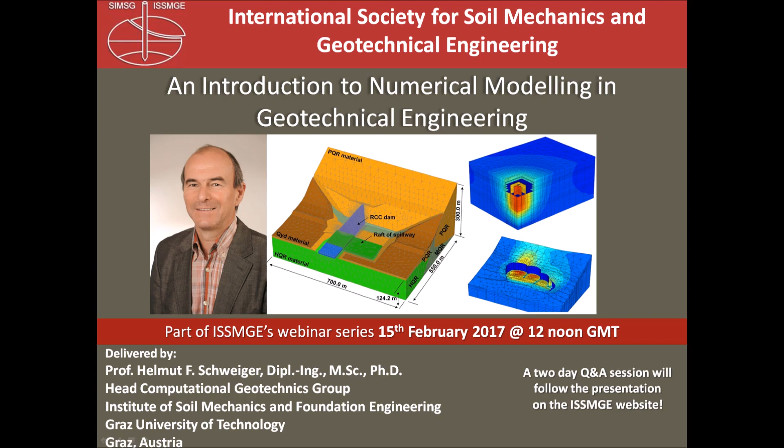Welcome to this webinar of the ISSMGE on numerical modeling in geotechnical engineering. This is supposed to be an introduction, and therefore I will address our younger colleagues and not so much the numerical expert. I will also concentrate on practice, so I will not talk about research.

The outline of the presentation is a short introduction into numerical modeling, then some specific aspects we have to deal with in geomechanics, a short note on constitutive models, and then I will present an example for an SLS calculation and for an ULS calculation. And then I will come up with some final remarks.

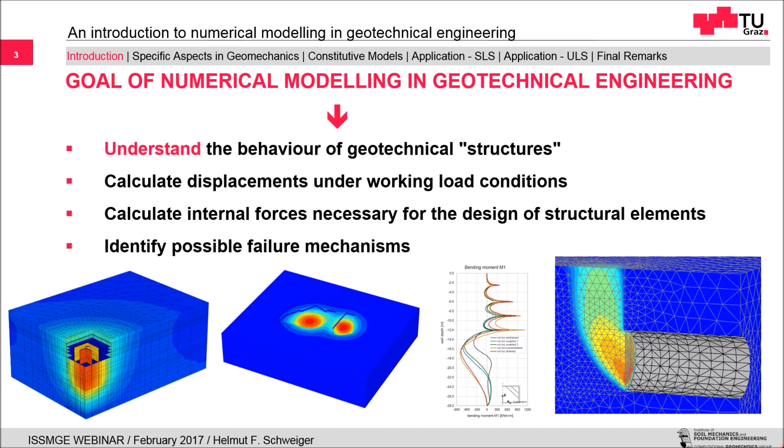Now, what is the main goal of numerical modeling in geotechnical engineering? First of all, I would say it's understanding—understanding the behavior of geotechnical structures. But of course, we also want to calculate displacements under working load conditions. We want to work out internal forces which are necessary for the design of structural elements, and we want to identify possible failure mechanisms.

We can do this when we have appropriate geotechnical models and a very good understanding of soil mechanics. This is sometimes overlooked when people do numerical analysis—that the basis of all of what we are doing is soil mechanics. We need to understand what the software, and in particular the constitutive model we are applying, does, and have a clear picture of what we can do and what we cannot do. So please be aware that we do models, we don't do reality.

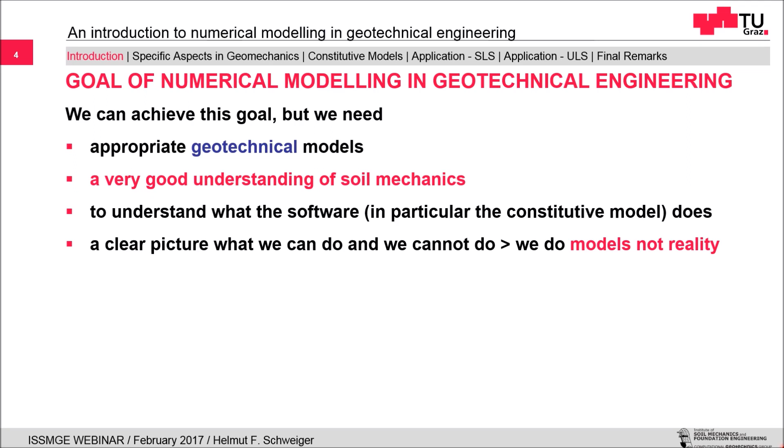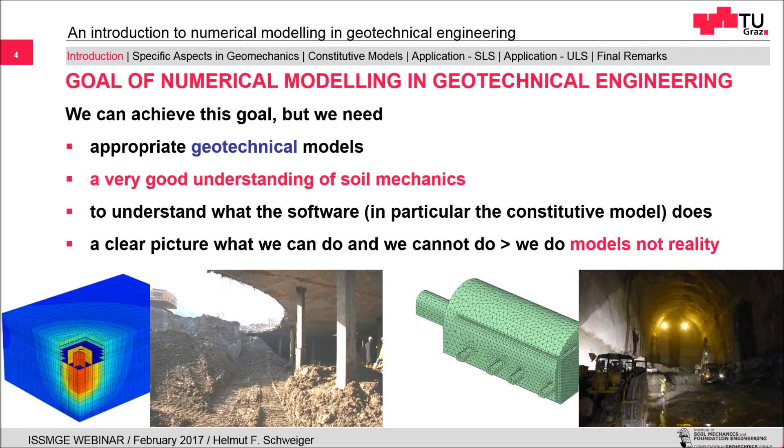As an example, I have a picture here of a deep excavation, how it looks on the computer and how it looks on site, and the same for a big cavern. This is just to emphasize that we can never picture the situation one-to-one into a computer.

The scope of this lecture is to make you aware of specific problems we have in numerical modeling in geomechanics, which are different to, let's say, structural engineering or mechanical engineering. I will give some guidelines on the requirements for constitutive models for certain classes of problems like foundations and excavations, address determination of input parameters—not going into much detail, but just highlighting a few of the difficulties we have—and point out some of the decisions you have to make when creating a numerical model for a particular problem. Along the way, I will try to highlight some pros and cons of numerical modeling.

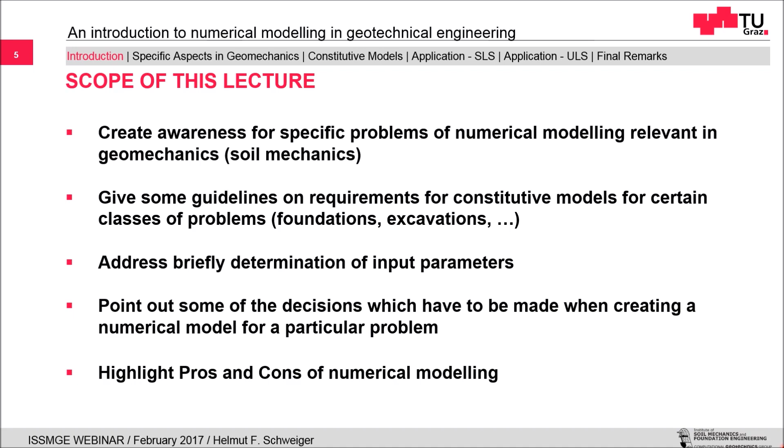I'm not covering numerical methods in detail in this lecture, so the theoretical aspects of it. I'm not going into plasticity theory, although the majority of constitutive models we use in practice are actually based on plasticity theory. This is not necessarily the case for some more advanced models, but in commercial codes, I would say most of the models are based on plasticity theory.

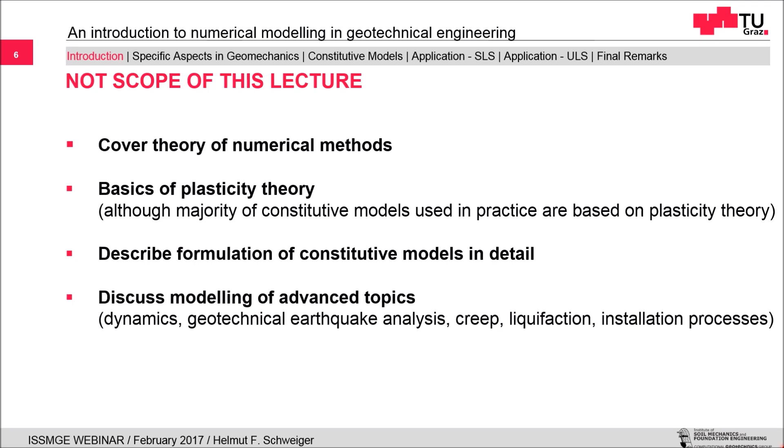I will also not describe constitutive models in much detail, and I will not go into advanced topics like geotechnical earthquake analysis, liquefaction, installation processes, dynamics, and so on. And I will also not cover the topic of how to arrive at a geotechnical model. That means how to establish the soil profile, the description of soil layers, etc.

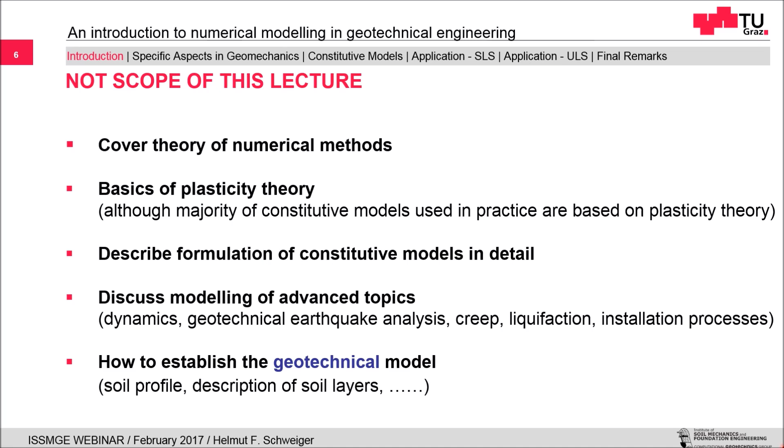Now to start with, I want to make a comparison between what I call here a conventional approach in geotechnical engineering and computational geotechnics. Conventionally, we analyze the serviceability limit state by some simple means, like taking models based on elastic half space or some diagrams or design charts, and the input parameter is some form of stiffness, let's say the one-dimensional compression modulus for a settlement analysis.

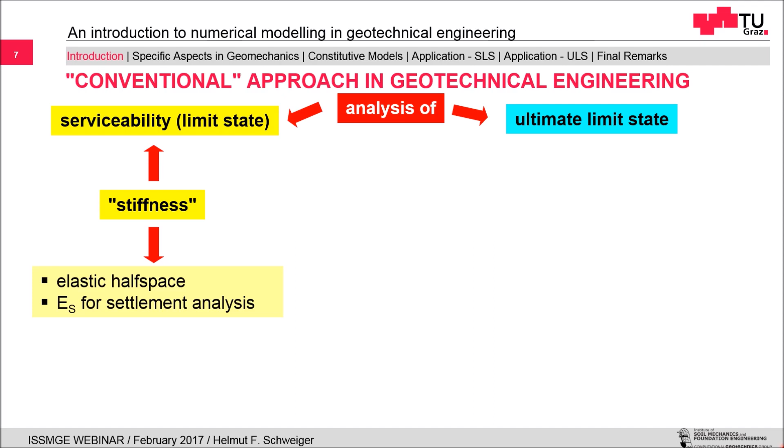And then we do an analysis of the ultimate limit state, which is a completely different model, and that is what we usually do by means of, for example, methods of slices if we do slope stability analysis, or other limit equilibrium methods. Here, of course, the governing parameters are the strength parameters, that is effective friction, cohesion, or the undrained shear strength. Now, these two models and also the input parameters do not interact at all. These are two completely separate analyses.

And that means that we have to significantly simplify the material behavior and to some extent also the geometry. Now the advantage of this is that we have several decades of experience, but the disadvantage is certainly that for complex soil structure interaction problems, a realistic assessment of displacements for working loads is not really possible.

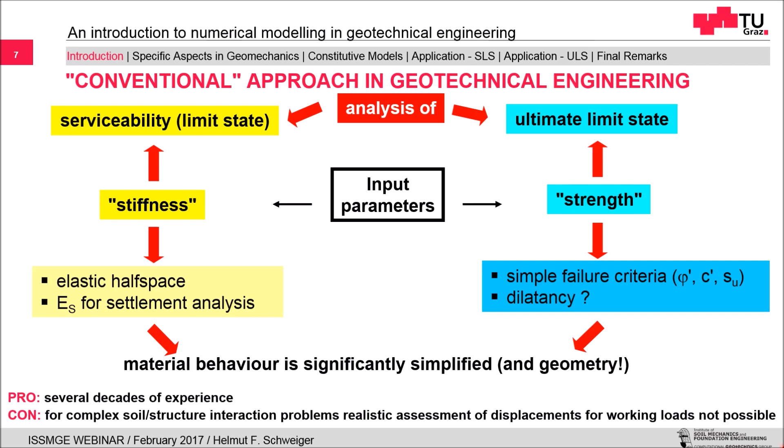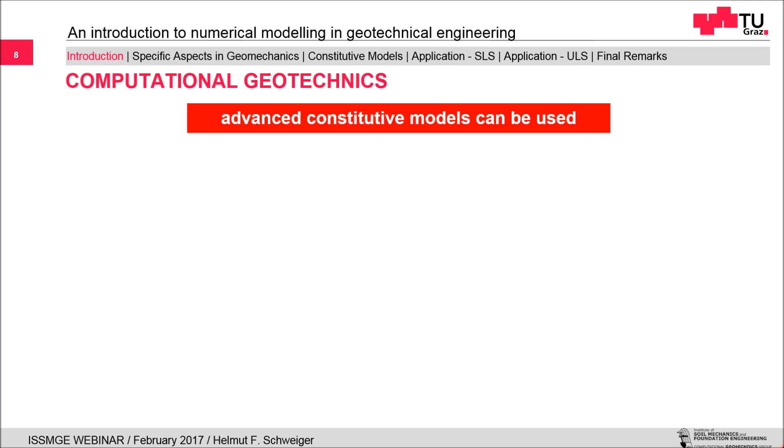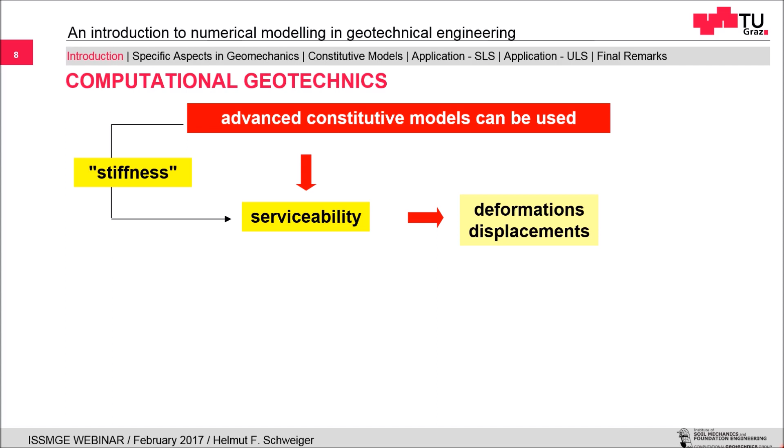Now on the other hand, if we do computational geotechnics, we can use very advanced constitutive models. That means we also will work out deformations and displacements under working load conditions. But now, instead of moving to another model, we can use the same model to work out ultimate limit state conditions. That means we will obtain a failure load or a failure mechanism. You can do this in different ways, and if you have a foundation, you probably simply increase the load until you reach failure. Or in other cases, you may reduce the strength of the soil until you reach numerical failure. And from that, you can then work out your factor of safety.

Now the key issue here is that you can use the same model as for the serviceability limit state. And also the parameters are not that clearly separated anymore, because your strength will influence serviceability to some extent, and depending on the model, stiffness will probably have some influence on the ultimate limit state.

Strictly speaking, we could also do post-failure behavior, where I mean that you have materials which show softening behavior, but I have to mention that you have to enhance your finite element formulation for doing so in order to get mesh-independent results, and this is beyond the scope of this lecture today.

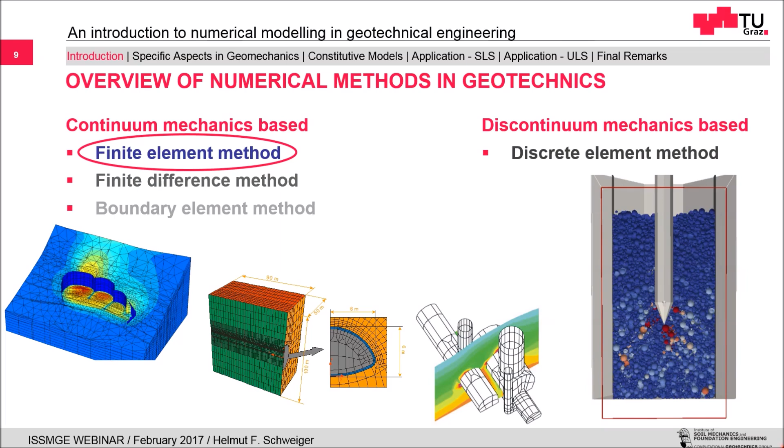However, if you embark on a numerical analysis in geotechnics, you have basically two classes of methods. The first one is based on continuum mechanics, so that's the finite element method, for example, the finite difference method, or the boundary element method. And then you have methods which are based on discontinuum mechanics, and this is, for example, the discrete element method. Now I will concentrate today on the finite element method, but most of what I say will equally be valid for the finite difference method.

Now, what are the main problems we solve in geotechnical engineering? First of all, we want to have, as mentioned before, displacements and stresses under working load conditions. So we apply a load, and that can be very general, also an excavation or whatever. And we may solve a flow problem. So we apply a head and obtain a flow pattern. And in some cases, of course, we have to couple the two. Now, what we would like to have is a solution in any point of our project, but that is, of course, not feasible.

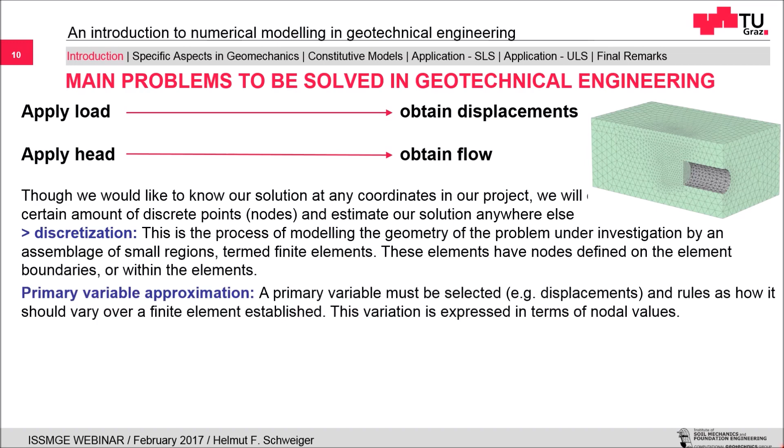So we do what we call a discretization. So we divide the domain we want to analyze into so-called finite elements, and we actually obtain our solution only in certain points, at the nodes of these elements. And then we make some assumptions how our primary variable, which in a mechanical analysis in the simplest form is the displacements, varies over the element, and usually we do this by means of a polynomial.

This implies that we can have different forms of polynomial, which means we have different finite element types. And in short, the higher the number of nodes, or the higher the order of the polynomial, the more accurate the results will be. Now, what is important to see here is that the solutions we obtain are not the exact solutions, but are approximate solutions to the boundary value problem we are solving.

And of course, the better the model, and I put "model" in quotation marks, is not only the element, it is really all our modeling assumptions we have to make, and I will come back to that when I show the example. The better the model, the more accurate is the solution. However, for a real boundary value problem, we will never know how far away we are from the exact solution, because for a complex real geotechnical project, we do not know the exact solution. But that doesn't matter. I think we just have to make sure that we make a good, appropriate model, and then we will be close enough for any practical purposes.

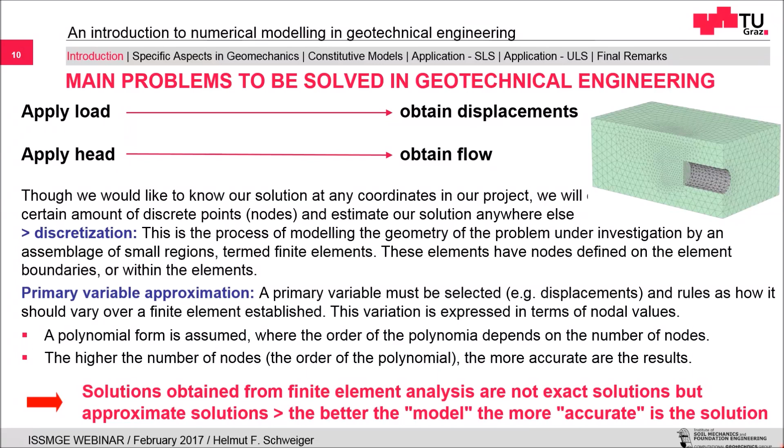Now, coming to some specific aspects we have to consider in geomechanics, which we do not have, let's say, in structural engineering or in mechanical engineering. First of all, strictly speaking, we have to choose the domain we are going to analyze. A priori we cannot say how far the influence into the surrounding ground of an excavation or of a tunnel will be. Of course, we have some experience and there are some guidelines on how large your domain has to be, but it is different from an analysis of a bridge where you exactly know your structure.

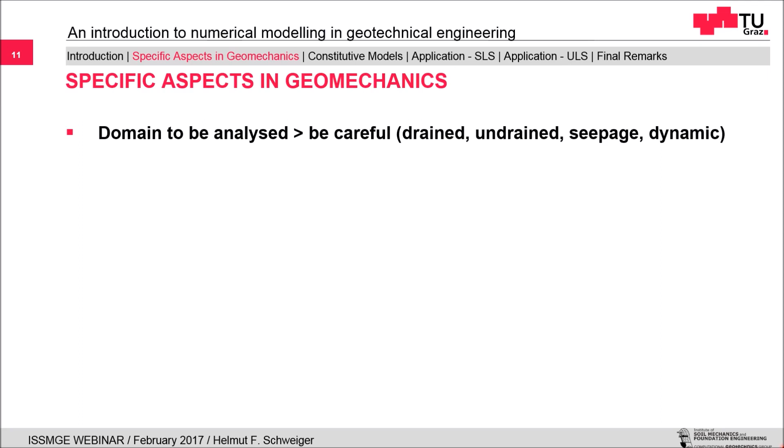Now, for the same problem, you also have to be careful, because whether you do a drained analysis, an undrained analysis, a seepage analysis, or a dynamic analysis, you will have to analyze different sizes of the domain. So that is one thing you have to be aware of in the first place when you start doing your model. Then we have to start with some form of initial stress state.

Now, if we are near surface, that is usually well known, so we will have the vertical stress based on the soil weight, and we will have some form of horizontal stress based on the K0 value. Now, if the soil is highly overconsolidated, then we have some uncertainty already in the K0 value, and we very often do not know exactly how large the overconsolidation was, and that will have some influence on the results, because all our analyses in geomechanics are nonlinear analyses, and so the starting point has an influence on the result.

We also have uncertainties in the ground profile and in groundwater conditions. We do have to model soil structure interaction. And here again, all codes will have some different approaches by using interface elements or contact elements. So you have to be aware again of the way your particular code is handling this soil structure interaction. We have to make some simplifications in modeling the construction sequence, and it's also very difficult to model installation techniques like jet grouting or mixed-in-place columns, for example.

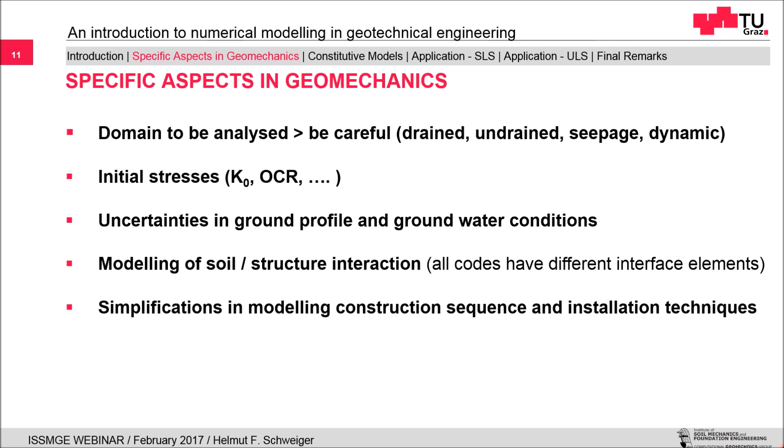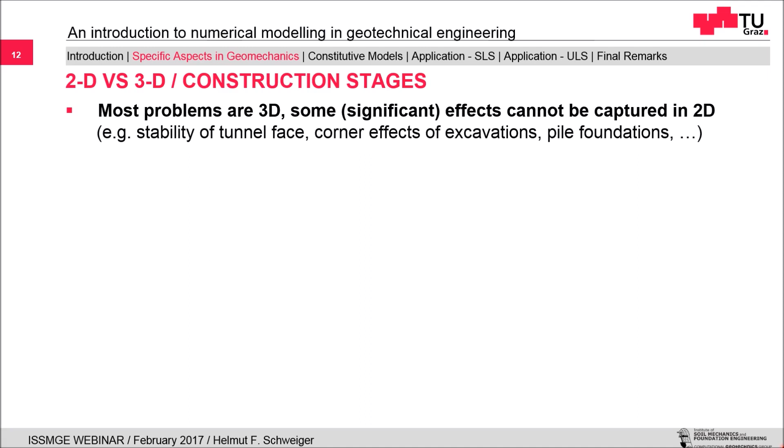And then most of our problems are actually 3D. And some significant effects we simply cannot capture in 2D. So one of these is the stability of a tunnel face, the corner effect of an excavation, or pile foundations or piled raft foundations. These are real problems you have to do in 3D. Now in practice, we still like to do 2D in many cases, mainly for time constraints. And we have invented some ideas how to include 3D effects in 2D analysis, like pre-relaxation factors in tunneling.

But again, this will be a decision you have to make when you start your modeling exercise, whether your particular problem is well enough represented in 2D, or you will miss too many details so that it is not worth doing it and you have to go to a full 3D analysis.

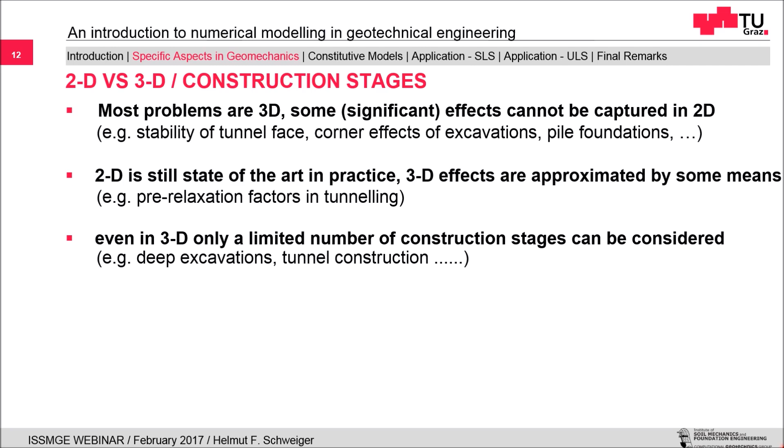Now, even if you do a 3D analysis, you will not be able to follow all construction stages in detail. So I have shown 3 examples in here where you will probably go for 3D, but again, you will not be able to model all the steps in your model. And you have to make a decision, what are the important phases which I have to have in the model and which ones are not so important, so then I can simplify them.

And then we also have to think about the constitutive model. Now, there is no such thing like the soil model. There are different models around, and if you have a certain code, you will have a library of soil models, but they will be different from code A to code B. Now, in practice, still some people use a simple failure criteria like Mohr-Coulomb for analysis of serviceability limit states of displacement and stresses, but this is not a very good choice, as I will be showing in a minute.

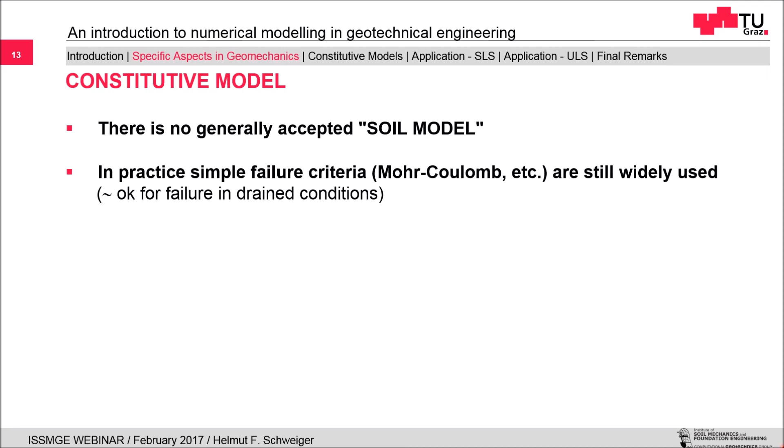It is, I would say, okay for failure in drained conditions. The next class of models, or the next model which is pretty popular and around for a long time, is the modified Cam-clay model. It has the significant advantage over a failure criteria that it is a strain hardening model, and this can be successfully applied in some problems like embankments on soft soil, although also we have made in the last decade or so some improvements on this type of models. Now, fortunately, also in practice, the benefits of using more advanced models are being recognized, in particular for excavation problems. And I will come back to that a little bit later on.

Now, why we still do not see that many of the advanced models used in practice is partly because in usual geotechnical reports we do not find all the parameters. Again, I will come back to this a little bit later. So parameter identification will still be a problem. And then sometimes for the client it is difficult to judge what he gains in terms of safety and costs.

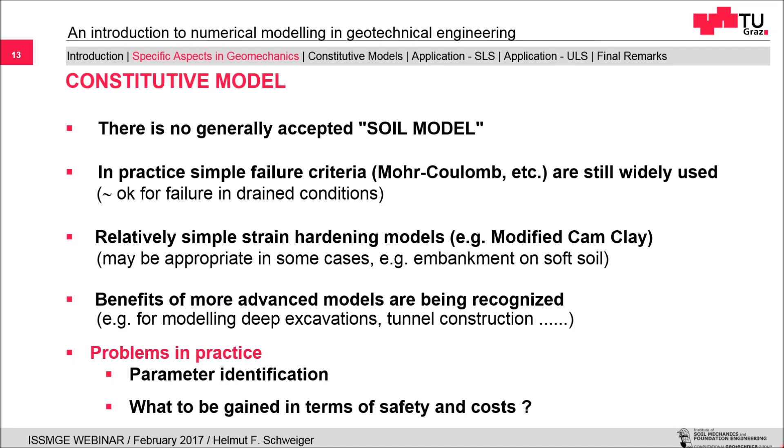I sometimes get a phone call, and a client asks me, if I give you a contract for finite element analysis, will I save on the reinforcement in a retaining wall? Well, that's not so easy to say, because it depends on a lot of factors, whether finite elements, for example, will give you less bending moment in your wall than a conventional analysis. But of course, as I hope to show you throughout this lecture, I'm of the opinion that you gain because you gain in understanding of your structure, and the better understanding of your structure will inevitably give you a higher level of safety.

Now, summarizing these issues we have just recalled, but putting them in a very positive context, I would argue that the advantages of numerical finite elements compared to conventional analysis are that you can simulate the complete construction history. So I have made some restrictions and said, well, you will never be able to follow all the details, but you can follow the history of excavation or building an embankment or a dam or whatever. If you know and if you want, you could, strictly speaking, also simulate the geological history, at least to some extent.

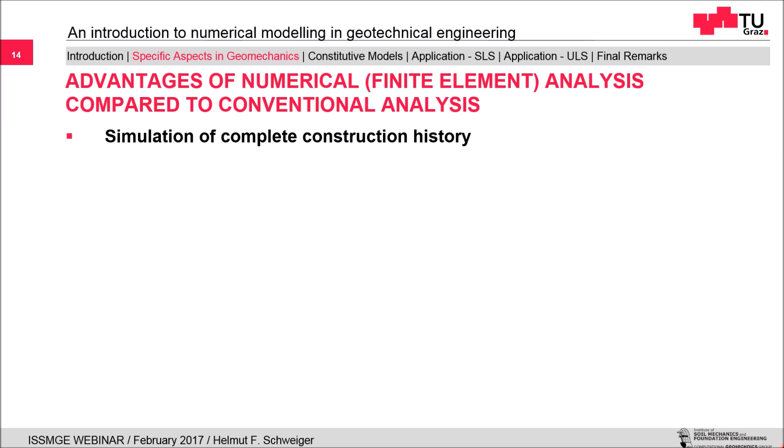You can then model the interaction with the water rigorously, so you can do a drained analysis, you can do an undrained analysis, you can do a coupled consolidation analysis. You will take care of changes in groundwater table during excavation if you lower the groundwater table, etc. This can all go into your numerical model. You can model complex geometry. At the end, there is no real limit on that. It's just how much effort and how much time you want to put into your model.

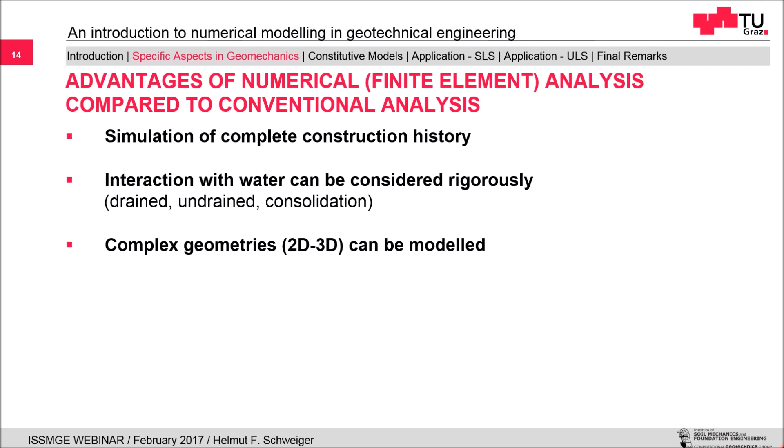But in theory, you can do very, very complex models, and you can use, if you want, and you have the respective code, a couple of million degrees of freedom if you want. But it's not always the case that you need that. So if you have a lot of experience, you will be able to make a model with a reasonable size.

Now, if you use an advanced soil model, you can capture important features of soil behavior. As I was mentioning before, there is no single universally accepted soil model. There are different models around, and different models can represent different features of soil behavior to a different extent. It depends really on your soil conditions, the ground conditions, and the purpose of the analysis, which of these models will be the most appropriate one for you.

We can model soil structure interaction by means of interface elements or contact elements or contact algorithms. But again, there will be some differences in codes. And if we look at failure, I think we have one significant advantage as compared to conventional analysis like limit equilibrium analysis, such as method of slices, where we have to assume a form of failure mechanism and the program then just picks up the one with the lowest factor of safety. But here, when we do finite elements or finite differences, we do not need to specify the failure mechanism. It is an outcome of the analysis. And this is, at least for complex structures, a significant advantage.

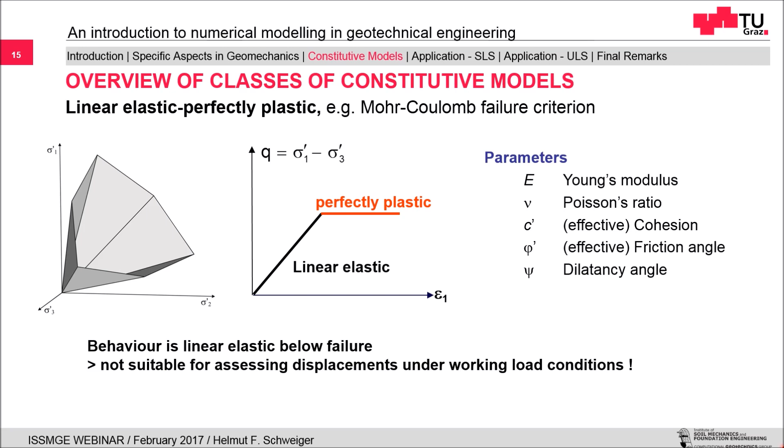A special case of this criterion is, of course, the Tresca failure criterion, where you put the friction angle to 0 and you put in as cohesion the undrained shear strength. And then you can use this criterion also for undrained conditions, but only in terms of total stresses. This is a very special case, which we usually do not recommend to use in finite element analysis, but you can do it because it's a clear simplification and you know what you're actually doing.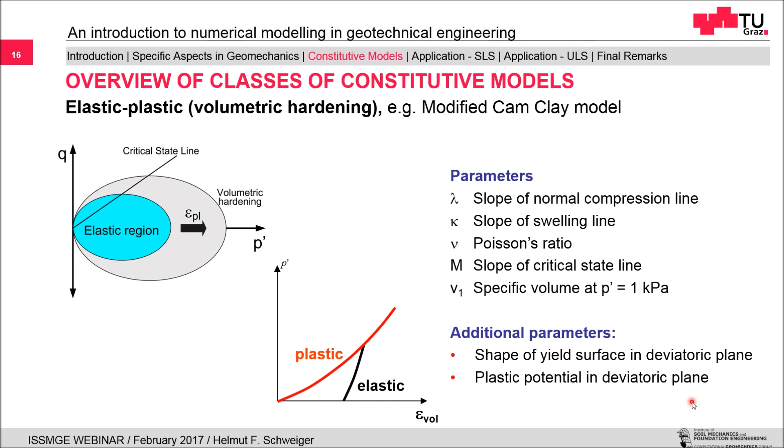Again, parameters can be obtained from oedometer tests and triaxial tests, but at the end you will need some form of engineering judgment, usually because they will not be given in the form you require them in standard geotechnical reports.

Now with the advanced models, what you can do is add additional features like small strain stiffness. That's again very common, and today I think all the codes will provide you with a model which can model small strain stiffness, meaning considering the high stiffness of soils at very small strains and their decay, showing here for an example the shear modulus against the shear strain.

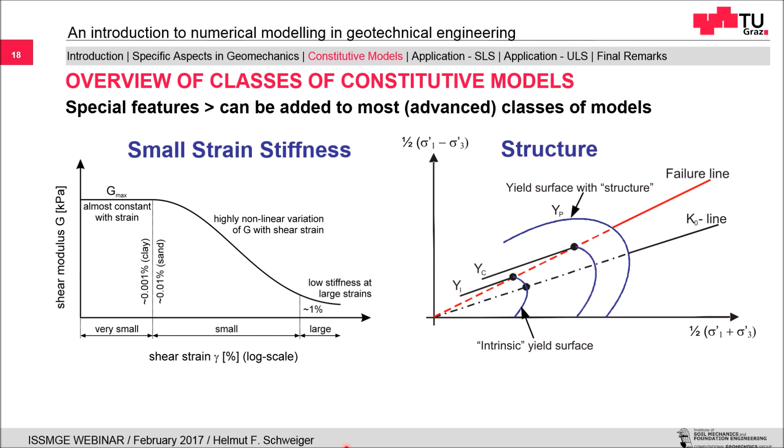Also, models can include structure if you have a clay, for example, and this is usually also based on modified Cam-Clay type models, but you could add this to most of the advanced models.

I will stop here in describing the classes because, as I mentioned before, I'm talking here about practice, and so I'm not going into models which are available only in research. But just to mention them, of course, we have models which have not isotropic hardening but kinematic hardening, models dealing with anisotropy, and models, for example, based on hypoplasticity.

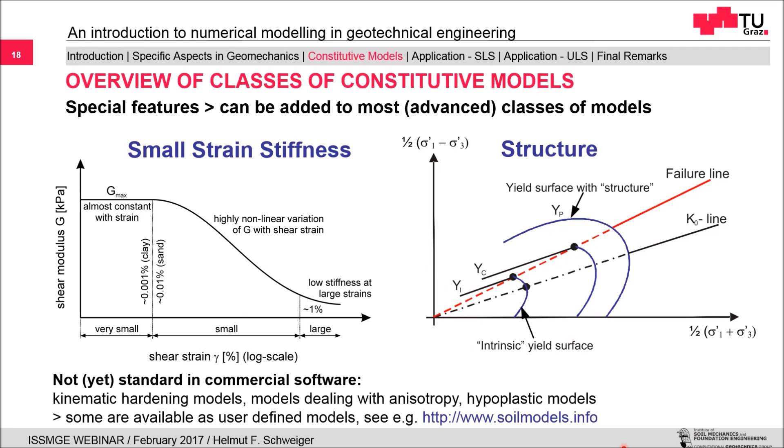Some of these models are actually available on the internet, and there is a platform which is given here, soilmodels.info, and here you will find some very advanced models in the form of user-defined soil models, and you can then add them to, let's say, Abaqus or Plaxis.

Now on this slide I will do something which is really dangerous. I'm aware of that, and I expect some criticism on that, but I give it a try. So what I want to do with this slide is to give you an indication of what type of model you need for what type of problem.

So I have indicated here failure, drained, and this FOS, I mean factor of safety, or undrained in total stresses. Okay, and the important thing is undrained in total stresses. If you do an undrained analysis of failure in terms of effective stresses for a soft soil, for example, then matters become a little bit difficult and are beyond the scope of this lecture.

Then I have here monotonic loading on a stiff soil. So with monotonic loading, I mean a structure, a building you put on piles or on a raft or whatever. The same thing on a soft soil, and an embankment, of course, also falls into this class of problems. And then I deal with excavation problems. And here on this axis, I have the models with increasing complexity.

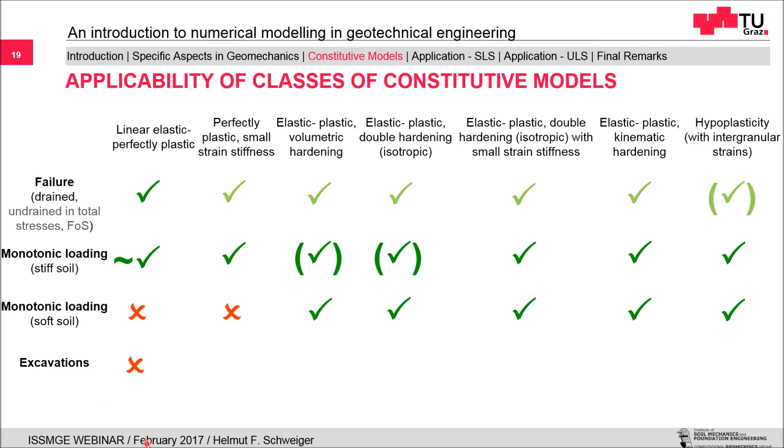Now excavations is probably the most difficult problem within these standard problems in geotechnics, I would say. So I said I won't cover dynamics and these sort of things. Again, for a stiff soil, highly over-consolidated, you may again get away with the failure criterion when you put in a reasonable small strain stiffness model inside.

Again, this elastoplastic volumetric hardening, the single hardening one with no small strain stiffness, will not give you very good results. The double hardening one is better, but still, of course, I would prefer these higher order models for excavations, whether they are in soft or in stiff soil. So the only difference is that for highly over-consolidated soil, you probably get away with this model.

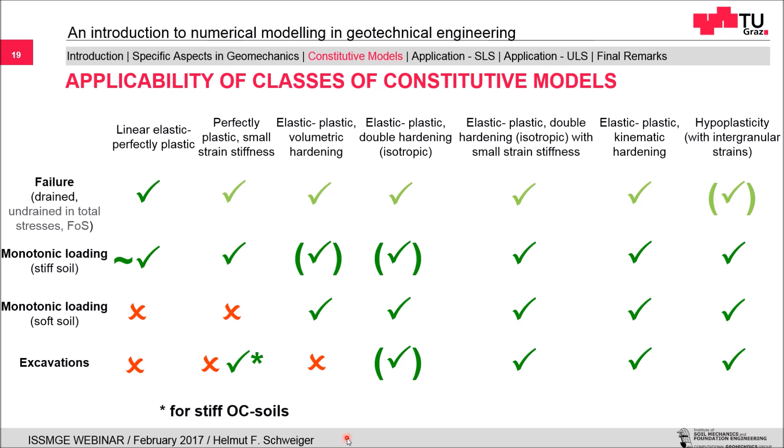So as I said, I'm fully aware that this is a bit of a dangerous thing I'm doing here, but I hope that for those of you who have not so much experience and start doing numerical modeling, it will give you some indication of what models you should look for if you have a certain type of problem at hand.

Now we move on to the two applications. And what I do with the first one is a deep excavation, and we look at serviceability state. When I describe this example here, I will point out a couple of decisions you have to make in order to arrive at an appropriate model. And then I will show you on the results what the influence of these decisions is.

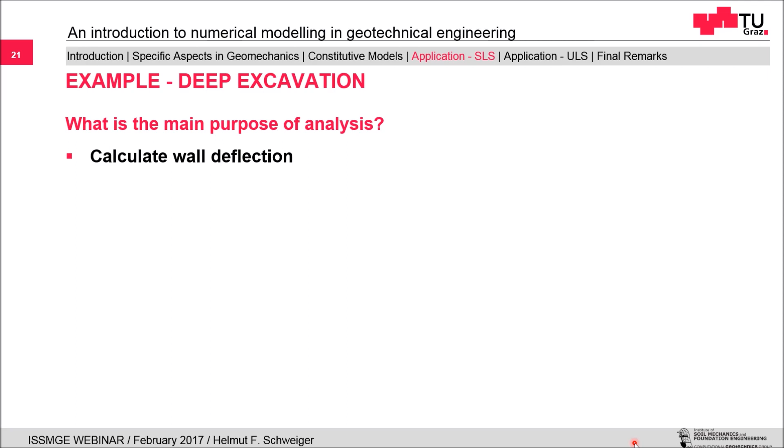Now, what we also have to be very clear about before you go to the computer and start modeling is what the main purpose of the analysis is. Why am I doing finite element for this problem? In this case, it's fairly clear. We want to calculate wall deflection, because the wall deflection will have an influence on the settlements behind the wall, and these settlements may cause possible damage to adjacent buildings. We want to have bending moments in the diaphragm wall in order to make a design, and of course also the strut forces. All these under working load conditions.

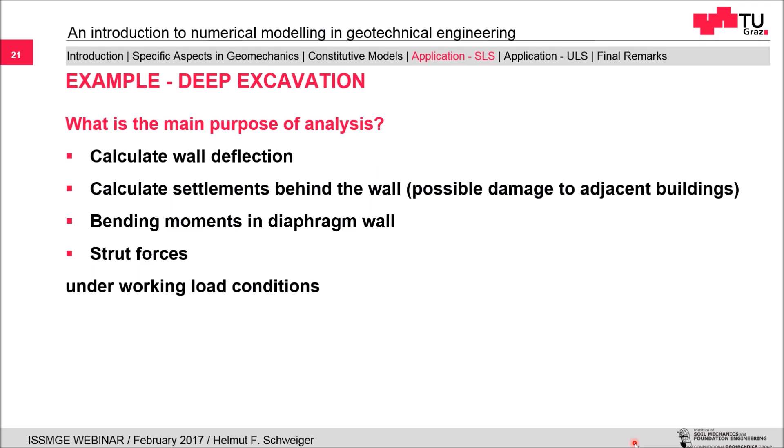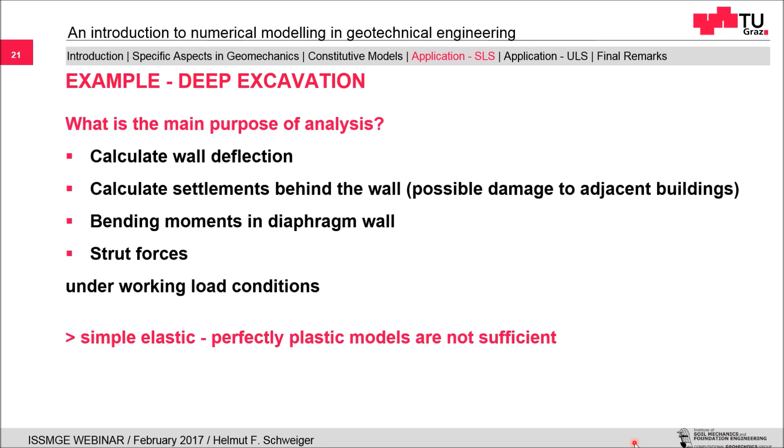Now, having mentioned working load conditions, you may use this analysis as well to do a design based on Eurocode 7, introducing partial factors of safety, but I'm not going into detail of how you do that. That would really be probably a separate lecture. But what this means is that a simple elastic, perfectly plastic model is not sufficient. And if you remember the slide I had just a few minutes before, when I was talking about different problems and classes of models, you will realize that I'm much more on the advanced model side for this type of problem.

Why is that? Well, the stress paths in this type of problem are not monotonic, so you will have significant changes in stress path directions. It depends, of course, a little bit on the construction sequence, on whether you pre-stress struts or you have anchors which you pre-stress, and so on. But in general, they are not monotonic. Different parts in your soil will follow stress paths which are by no means monotonic. You will have parts which are in primary loading, and you will have parts in your soil mass which are unloading or reloading. And this, of course, invokes different stiffnesses, and the model has to do this. You will have areas where you have plastic strains, relatively large strains probably, but then you will have parts in your domain where you have very, very small strains.

That means your decision number 2 you have to take here is the constitutive model. And as I mentioned before, we will go here for a double hardening model with small strain stiffness. That is in line with what I have said before.

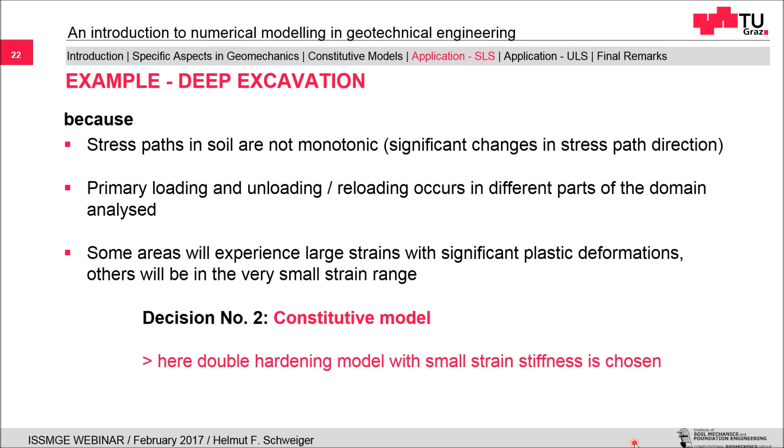Now, when we do 3D, our next question has to be: can we apply symmetry? It may not be obvious at first, but if you go for a 3D analysis, you will realize that you end up with very large models very easily. Of course, computers today can do that, but you still want to simplify as much as possible. And this again depends not only on the geometry of the excavation, but also on the buildings which are surrounding it.

In this particular case, we chose symmetry. I have to say that this example is based on a real project, but we made a parametric study investigating a couple of things, and there we simplified it to allow for symmetry. This decision has to be made, but whenever possible, please make use of symmetry, because you can reduce your computational effort.

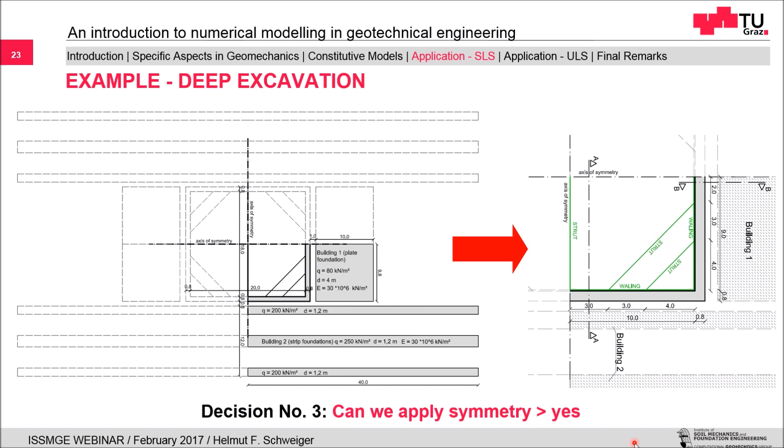Now, once you have done that, you have to make another decision: what are the relevant construction stages, including changes in the groundwater. It depends a bit on how you construct the excavation, but in this case we have a diaphragm wall, and in most cases in practice you will not model the installation of the diaphragm wall. You could, and there are some papers in the literature which tell you how to do that, but in most cases in practice you would do what we call wished in place. So that means you will simply place the diaphragm wall into your model.

But that means, and that is what you have to be aware of, you will not have deformations or displacements obtained from your model which are caused by the installation of the diaphragm wall. Whether these are significant or not depends very much on the soil conditions, but also on workmanship on site and other issues. So I'm not going into detail of that. But what you will certainly do is specify certain excavation levels you want to have in your model, and that is what you have to provide for.

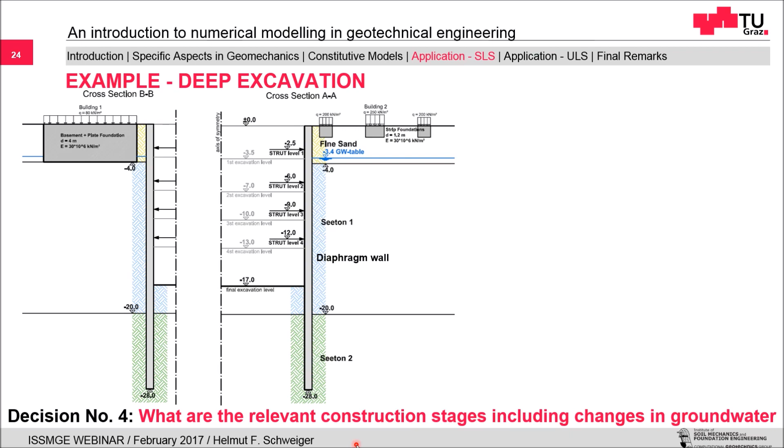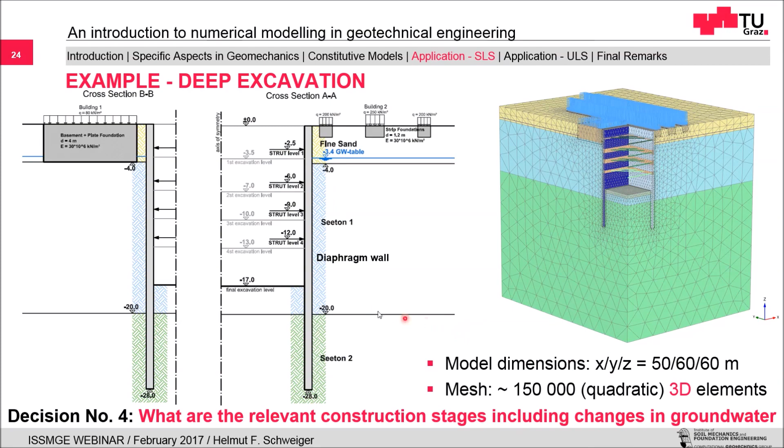Of course, you have to make phases where you install your struts, probably pre-stress them, and not to forget, you also have to consider changes in the groundwater. In many cases, you will not change the groundwater table outside, or you will not be allowed to do so, but you will of course change the groundwater table inside the excavation. There again, it depends very much on the soil conditions whether you do a flow analysis or make some assumptions on the groundwater. But you have to think about it and make the appropriate choice in your model. In this case, we ended up with a model like this. You see the excavation stages, the struts, and the load on top of it, and this gave about 150,000 quadratic 3D elements.

Now, the type of analysis is the next step: drainage conditions. Again, this depends on your ground conditions, and in particular on the ratio of the permeability of the soil layers with respect to the time you need for construction. The limiting cases are a fully undrained analysis and a fully drained analysis. What is usually more realistic is a coupled analysis, so you do consolidation during excavation. One extreme case is that you do an undrained analysis and then a consolidation at the end. It really depends on the soil conditions and on the time of construction, but you have to think carefully about what form of analysis you will perform.

And then you have another option in how you model the wall. We assume here, in this particular project, that we have a diaphragm wall. Diaphragm walls are, I would say, at least 80 centimeters thick, or maybe 100, 120 centimeters. And that means if you model the wall by a plate element, or in 2D maybe a beam element, what happens is that you basically ignore the physical dimensions of the wall.

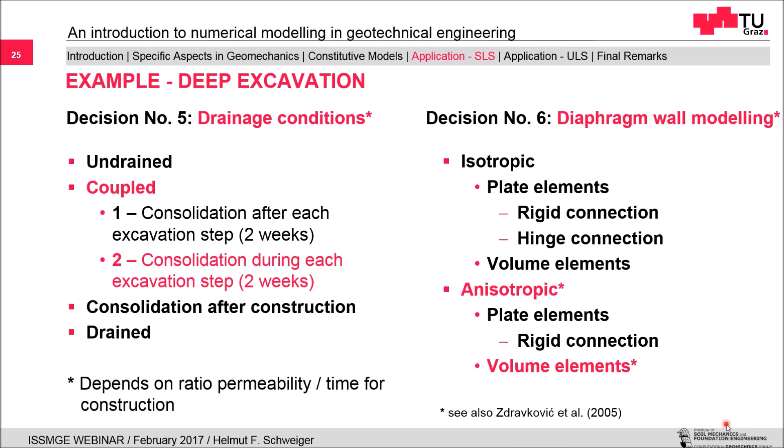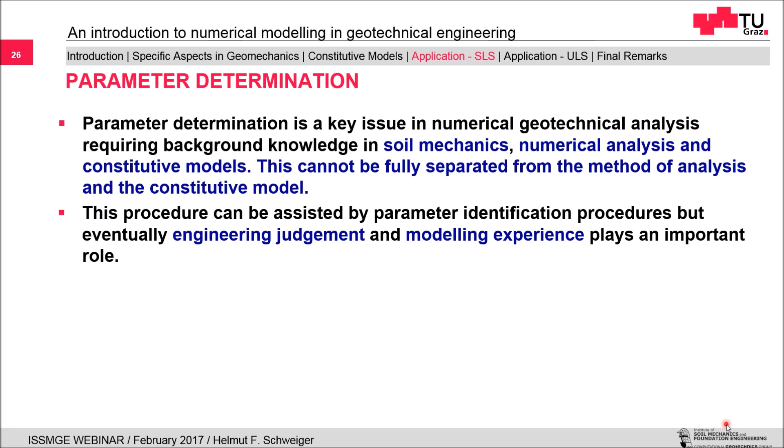Now, parameter identification. This is a key issue in numerical modeling, and unfortunately this cannot be separated from the method of analysis and the constitutive model we are using. It needs really a good background in soil mechanics and in the model you're going to employ. This is a bit unfortunate, but it is like it is. Now, some codes provide you some form of parameter identification procedures which really help in getting your parameters, but at the end you always need quite a bit of experience and engineering judgment to arrive at a good set of parameters for your particular model.

And in most cases you will not get these parameters directly. You will need some interpretation from the available information of geotechnical reports. And usually these reports will never be complete, so you will, in most cases, have to estimate additional parameters you need for your constitutive model, and of course this again requires some experience.

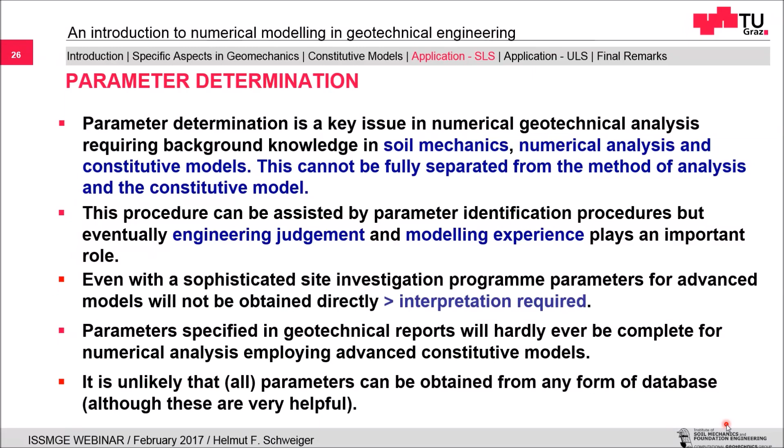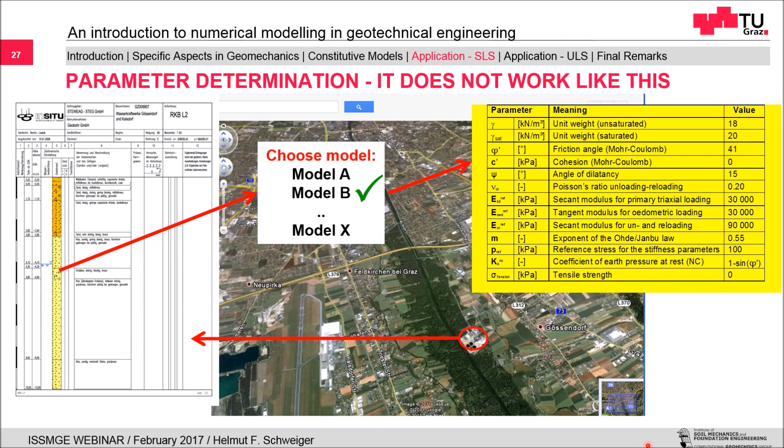Now, actually this is feasible, but then the dream of the numerical analyst is that you choose then for a soil model A, B or something, and then you get the parameters. But please look what I have written here. It does not work like this. So I don't believe in that, although I know that some software vendors try to do similar things, provide databases for their models for different types of soil, but I think this is really dangerous, and I strongly believe this should be the issue of the geotechnical engineer who runs the analysis to establish the input parameters.

Now, why is this so difficult? Well, first of all, similar parameters have different meanings and therefore consequences in different soil models. This is not very nice, but unfortunately it is like this. And that is again why you have to be pretty clear what your model does and what the parameters do in your model.

And one of the problems or the reasons for that is that many of our material parameters are not really material parameters. Now, what I mean with that is, as an example, if you have a quartz sand, and if this sand is in a loose or in a dense condition, then the material is exactly the same. It's the quartz sand, but even with advanced standard models, you will input different parameters for stiffness and strength. So these parameters are actually a mixture of material parameters and parameters which depend on the state the material is in.

Now, having said that, there are models around which overcome this problem, but as I said before, most of them are not readily available in commercial codes, and therefore they are not used that often in practice. But I think the modelers work on this.

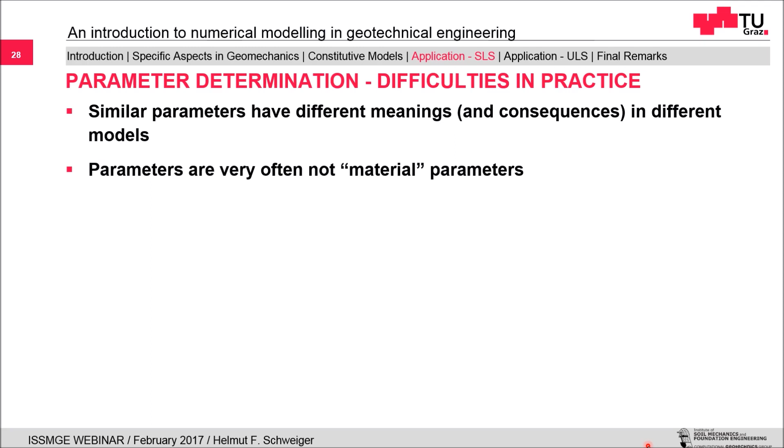Now also we have limited testing procedures in practice. I'm not talking about sophisticated testing for research, so the stress paths are limited, which also may have some influence on the parameters. We do have more and more correlations with in situ testing, so that's certainly a field which will improve and will make some progress in the near future, that we get better correlations from CPT, DMT or pressuremeter tests where we can get our parameters. I'm personally very much in favor of this in situ testing, but we are far away from doing a CPT test and saying, well, that's our parameters.

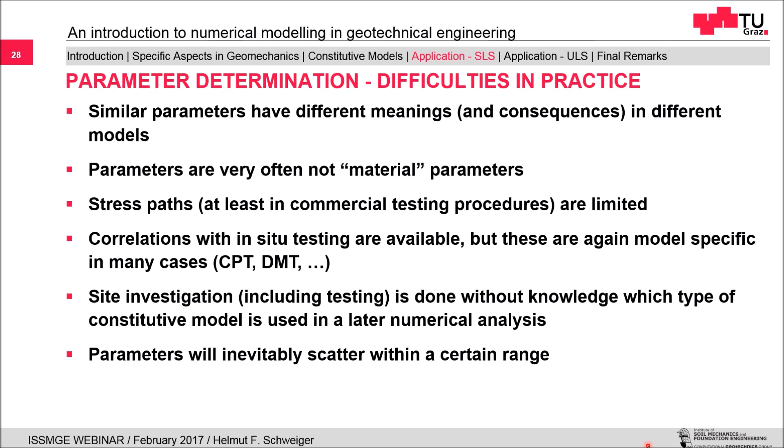To come to an end on these parameter determination difficulties, in most cases the site investigation is done without knowledge of what is done with the information. So sometimes we don't even know whether a numerical analysis will be performed or not, and also of course not which constitutive model is to be used. So that means we cannot really design a site investigation program specific to the needs of the model, because at the time you do that, you don't know the model. And also the parameters will inevitably scatter within a certain range. That is what we have to live with.

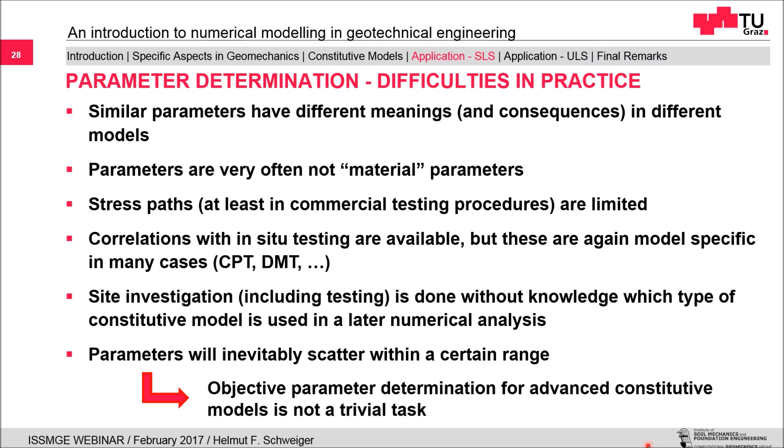That means parameter determination for an advanced constitutive model is not a trivial task. So this again needs a good understanding of soil mechanics and the constitutive model you are using. Now in this particular case, as I mentioned, we use the HSS model, and this is the list of parameters you have to define. And I can tell you, we got this set of parameters for this excavation in Salzburg, mainly by back analysis of structures where we had measurements. We back analyzed these excavations, and from these back analyses over the years, we actually came up with a decent set of parameters for this type of ground conditions. So I'm not going into further detail of that.

Now, what you can do sometimes, and what is an issue if you do an undrained analysis in terms of effective stresses, which you should do, is this: if you have undrained triaxial tests, you can back calculate them with your soil model with effective strength parameters and see what undrained shear strength your model predicts for a certain stress path, let's say triaxial compression, extension, simple shear, or whatever you find relevant for your problem. That is actually what you should do, because obviously in a constitutive model in terms of effective stresses, the undrained shear strength, which is by no means a parameter, is not an input. What also helps, if you have pressuremeter tests, is that you can back analyze the pressuremeter test, and by means of this back analysis you can optimize your parameters. But this of course is a boundary value problem. You have to model this as a real boundary value problem and try to fit your test results.

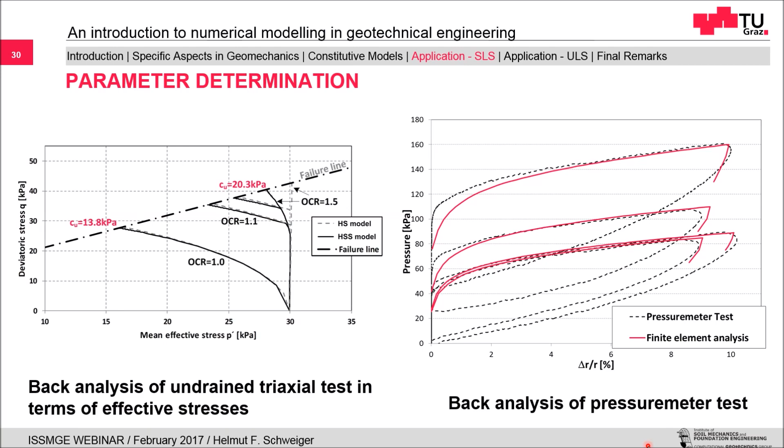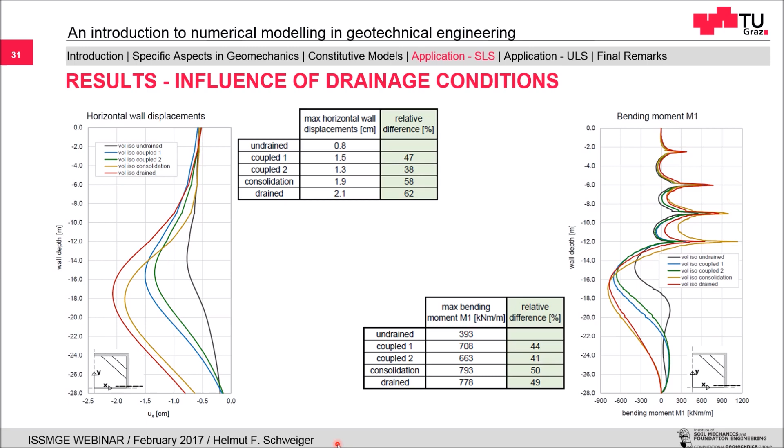Now what do we obtain as a result? I have mentioned before that I will show you the influence of certain modeling assumptions. This here is the first, the influence of the drainage conditions, and what you see here is the wall deflection for the undrained case. These two are the different coupled cases, and this is the drained case. Now of course this is what you expect. The coupled one is between the limiting cases, drained and undrained. And again, you have to make the decision whether you make it simple and say, well, I can live with the drained one, overestimating my wall displacements, or you have to go for a coupled analysis. Please note that doing an undrained analysis with a final consolidation step does not give you exactly the same result as a drained analysis in the first place, because the stress paths you follow will be different. And of course, you will also have differences then in the bending moments.

Now this slide shows you the influence of modeling the wall. The blue lines here are the comparison of modeling the wall as a volume element and a plate element for isotropic modeling, and the green ones are again the difference between plate and volume element for anisotropic modeling. And you see that how you model the wall has some influence on the deflection. So you have to give some thought to what you use. And here is the difference in whether you model the wall as isotropic or anisotropic for different drainage conditions with the volume elements. So again, you see that, for example, in the drained conditions, the difference between isotropic and anisotropic wall modeling is quite significant. In the undrained case, it is not so.

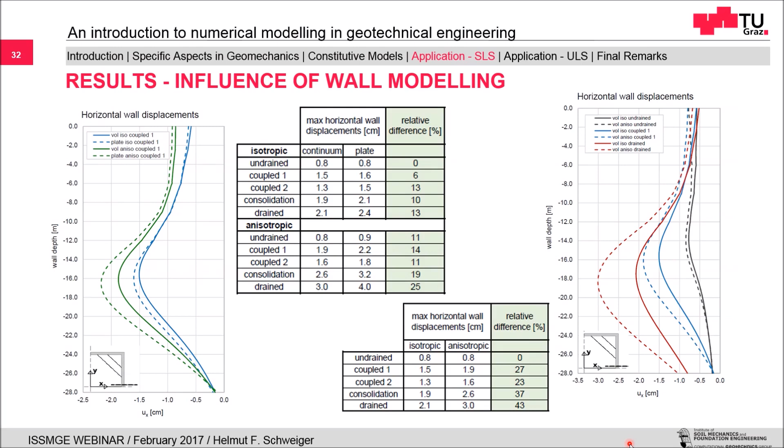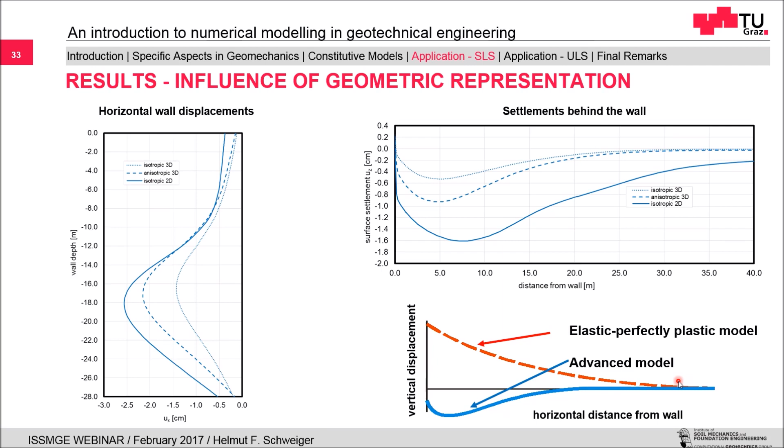Now, evaluation of results. There are different ways of doing so. One way is to use simplified methods to get an order of magnitude, or you can also go into the literature and look at some data which is published there.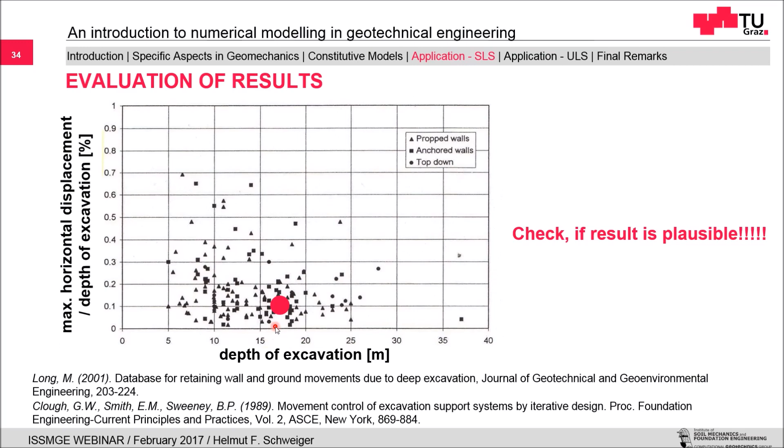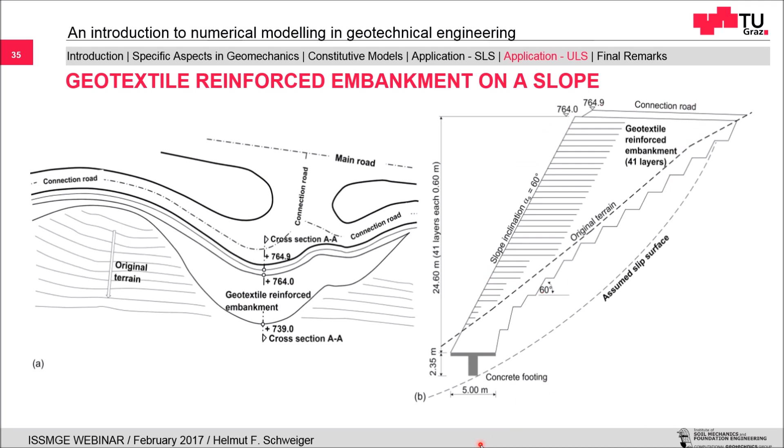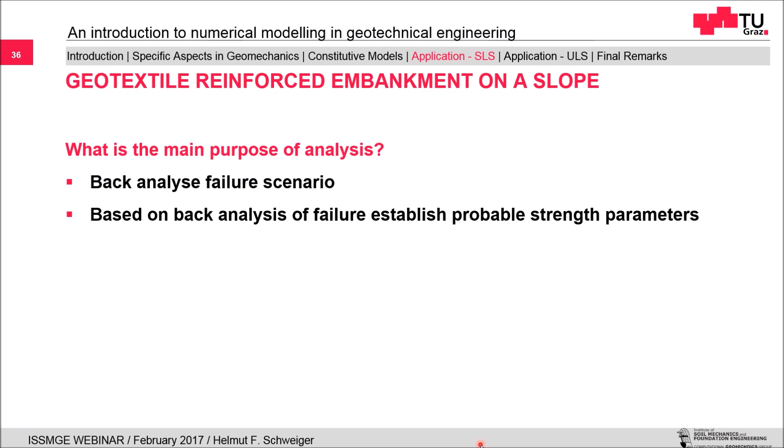Now, quickly on a completely different example, this is a geotextile reinforced embankment on a slope. So this is a widening of a road here, a connection here. This is the original slope, and there was an embankment built on here. Now this embankment failed, and the purpose of the analysis was to back analyze the failure scenario, and based on this back analysis establish probable strength parameters, and from there assess the effectiveness of reconstruction measures and calculate factors of safety for various stages of reconstruction.

So in this particular case, a simple elastic perfectly plastic model is sufficient because we are not looking at displacements here. Now that's the situation, so that's the model. The average inclination of the original slope was 34 degrees. Then the embankment was built on there. It failed at this level. And then this was the reconstruction, so they moved the embankment towards the back, put in some anchors.

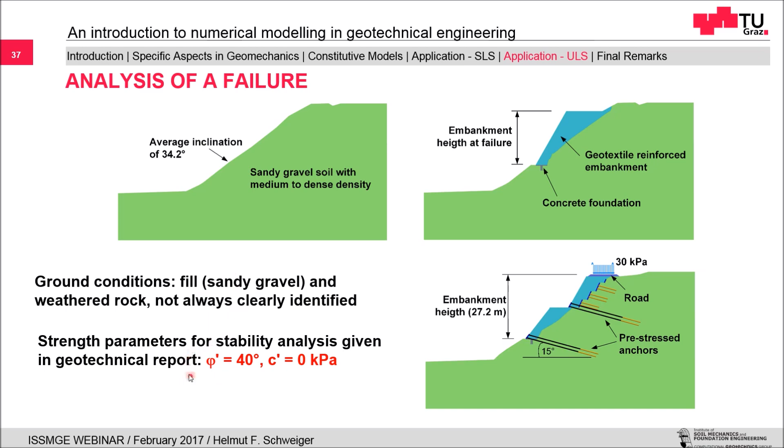Now ground conditions was a sort of sandy gravel, weathered rock, not always clearly identified. But the interesting part was that the geotechnical report gave strength parameters of 40 degrees and 0 cohesion for this. Now what happened? If we analyze the situation at failure, and we did it by different means, again remember I mentioned just try to back up your analysis with some different analysis by different means or good estimates or experience, whatever. So we did it here with finite elements with the so-called strength reduction method, and here we did it with finite element limit analysis.

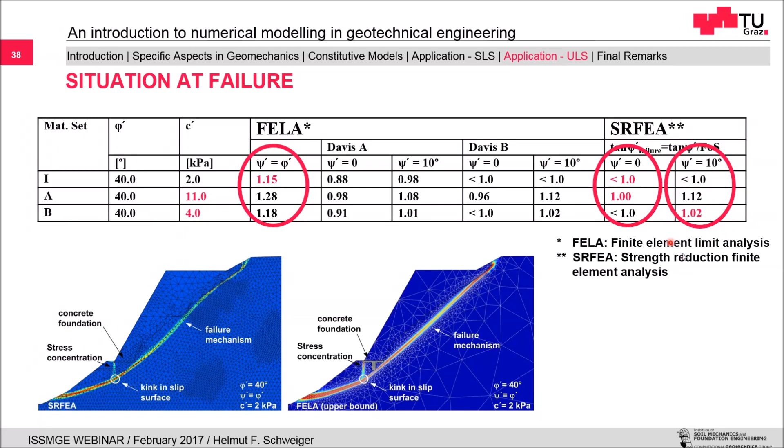Now what you see is if you do finite element limit analysis with an associated flow rule, so that means we take the dilatancy angle equal to friction, we get a factor of safety of around 1.2. Now if we do this with a dilatancy angle of 0, we see that we actually get failure. And if we take 10 degrees of dilatancy, this is a bit conservative maybe, but this is probably more realistic, we see that depending on the cohesion we take, we kept the friction at 40, you get actually factors of safety around 1, so that means failure.

Now the original design was on limit equilibrium, and you see here you got 1.2 factor of safety for this particular situation. So this was by no means conservative, and you will also realize you get similar numbers as you would get with finite element analysis using an associated flow rule. But I hope you will agree that nobody would actually use an associated flow rule for this type of problem.

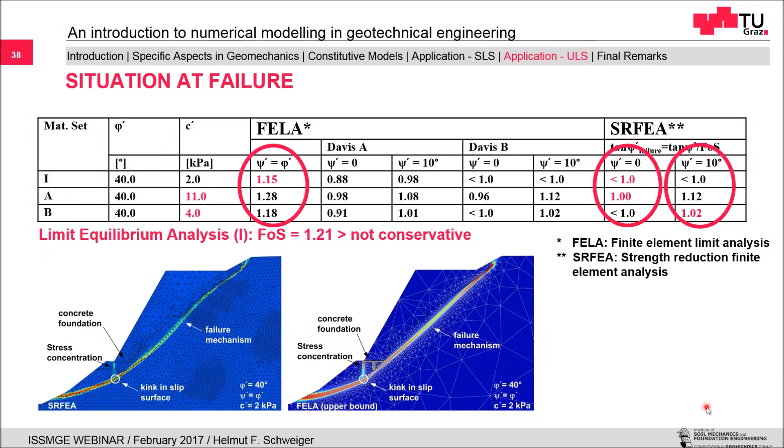And then of course you can do the analysis of the final stages after reconstruction. Again, I'm not going into detail of these modifications, how you can do finite element limit analysis with associated flow rule by modifying your strength parameters. So I have no time to go into detail of that, but what I want to show here with this

example is that compared to limit equilibrium analysis, the finite element analysis was able to actually capture the failure situation, and that if you use two different methods, you get very similar results, and that means you can be quite confident about the validity of your calculations.

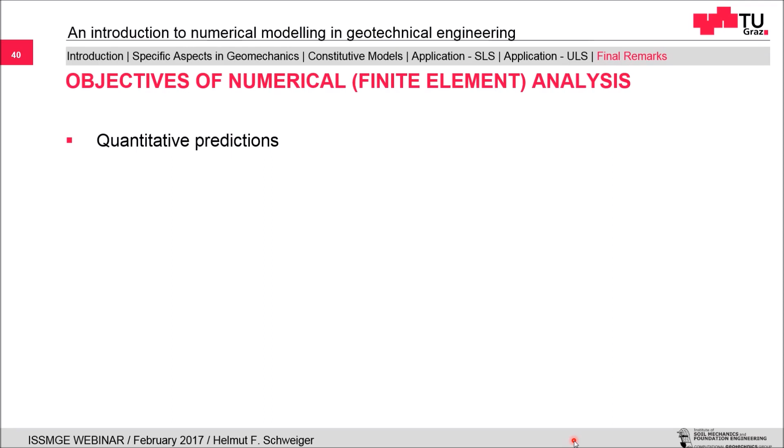Now some final remarks. What are the objectives of numerical analysis? Just to summarize, of course, we want to do some quantitative predictions. Sometimes we want to check alternatives of design. So you may have one design and another, and you may see whether they are equivalent in terms of displacements, etc. So you can check design alternatives.

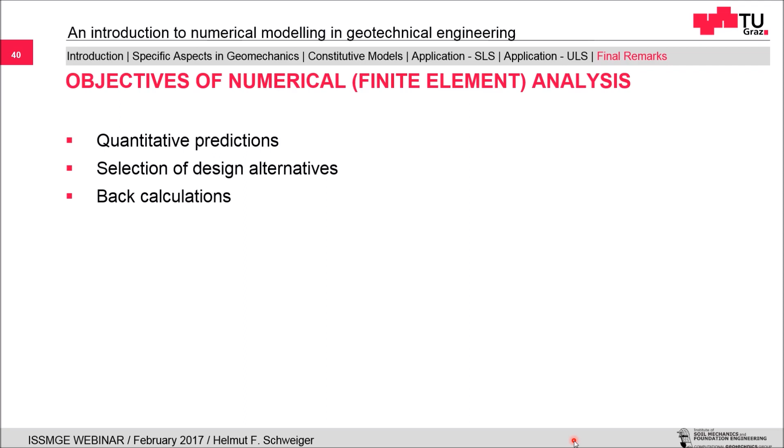You do back calculations. I mentioned that, very helpful in getting more experience under certain soil conditions. And the key thing I would say, and I repeat what I said at the beginning, is understanding. Try to identify critical mechanisms, try to identify key parameters. That's what is powerful about what you can do with numerical methods. And of course, I also mentioned that you should be very clear what the purpose of your analysis is before you start modeling on the computer.

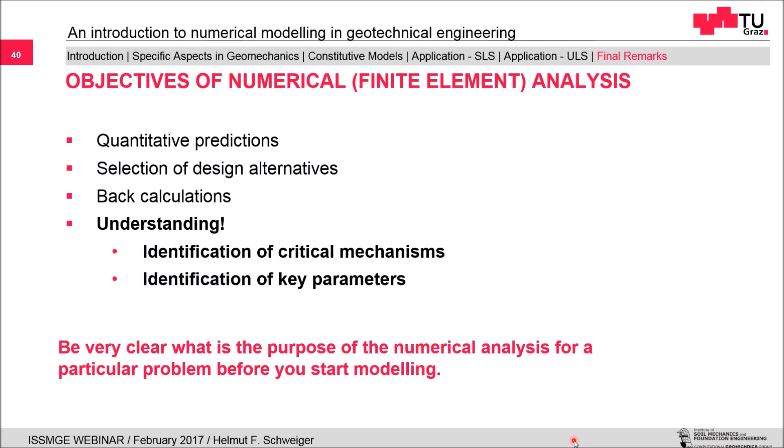What should you consider? Of course, you have to make the model as simple as possible. I mentioned that also. Don't go into very, very detailed models, but you have to be aware of what you simplify and what you cannot simplify. That's really the experience you need as a modeler, that you put into the model what is essential, but forget about things which are minor details and change the results by a few percent.

You have to select the appropriate constitutive model, of course, and this is also something I want to point out at the end. Pay attention to patterns of behavior. So try to model the system behavior and not a particular value of displacement. So try to get everything right, reasonably right. Deflections, settlements, stresses in struts, etc.

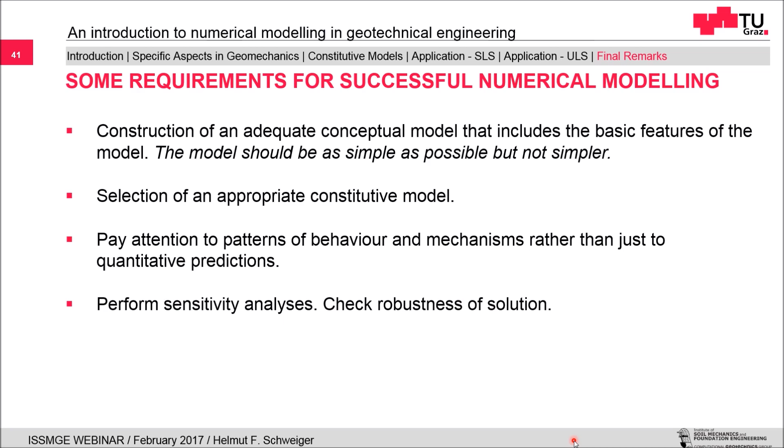Perform sensitivity analysis. Check the robustness of your solution. So what you should do is change a parameter and run it again and see whether the global behavior is very similar. Of course, numbers will be different, but the system behavior should be the same if you make a small change in your parameters. If it is not the case, then be careful and go into detail and see what the reason is.

And of course, model calibration should always be done by whatever means are available. So that could be the experience of a senior engineer in your office. It could be a simple analytical solution. It could be a database, etc. But try to make sure that your results are reliable. Okay, and this I also mentioned already. So I will finish this presentation with a few quotes.

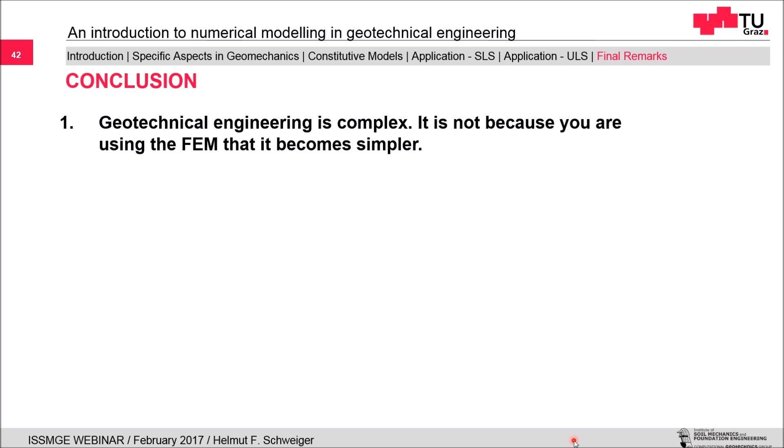Geotechnical engineering is complex, and it is not getting easier when you use the finite element method. Actually, it gets more difficult because on top of all the soil mechanics, you have to understand finite elements and in particular the constitutive model. Now, of course, you need a good program, but don't blame the program if it doesn't give you correct results. In most cases, I would say almost in all cases, it's the user who is responsible for the result and

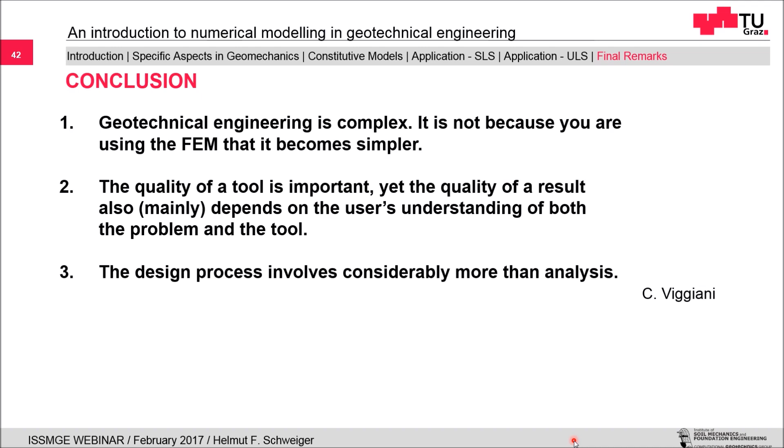who is the one who makes the mistakes and who is the reason for getting nonsense out of the result, which is actually very easy to do by doing some incorrect modeling assumptions or even some stupid mistake in input parameters, etc. And of course, the design in geotechnics is considerably more than this finite element analysis. Now, I borrowed these quotes from Carlo Viggiani.

So finally, I would say that if properly used, numerical methods are a powerful tool with significant advantages compared to conventional analysis, and I hope I could show that in this lecture. But the keyword here is properly used. So this is my final advice. If you do numerical analysis, make sure you understand what the program does, what your constitutive model does. Think about your modeling assumptions.

Think about the parameters you put in, and don't use it as a black box and say, well, the computer has said that this is the result. You have to be sure that you believe the result you obtain.